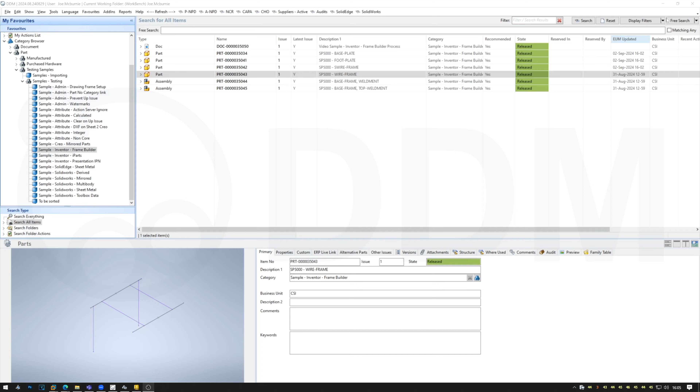Okay, I'm going to go back to Inventor and create a new assembly. So, standard assembly here, and I'm going to load into my assembly as a subpart my wireframe, like so. So here is my wireframe.

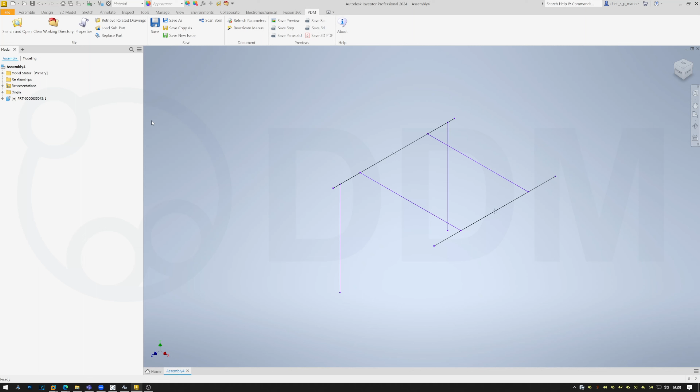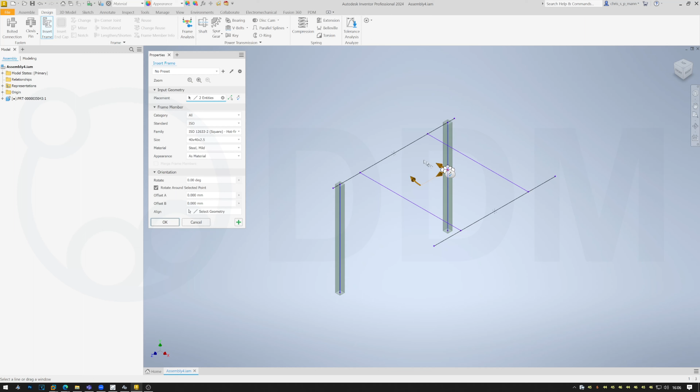What I'd like to do now is go into my design and insert a frame. I have to save it first, so I'm just going to save it locally to my working folder to pick up the assembly file. Now I'm going to choose my square hollow section 40 by 40 by 2.5, mild steel, etc, and we're just going to start by introducing these two vertical legs and this horizontal leg, and we say OK. I'm going to take the defaults. We've created 3 new parts.

Okay, if I now go to my PDM menu and I want to save this to DDM, it's going to start by saving each of the new legs. We've got this vertical leg. I'm going to drop it into a category like so and reserve it to my project.

The next vertical leg, let's copy that, paste that in, and I'm going to again put it in this category and reserve it to my project folder. We've now got the horizontal leg. Okay, copy that, paste. So saving the 3 extrusions.

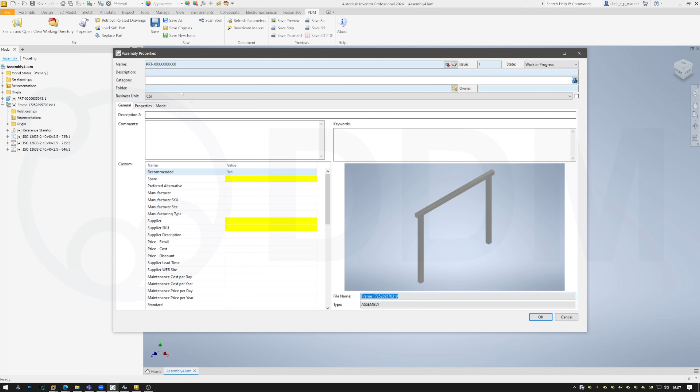And the next thing we'll be saving is the frame itself. Okay, I'm just going to call this, taking the defaults, I'm just going to call it that number, put it into this, and again store it down to my...

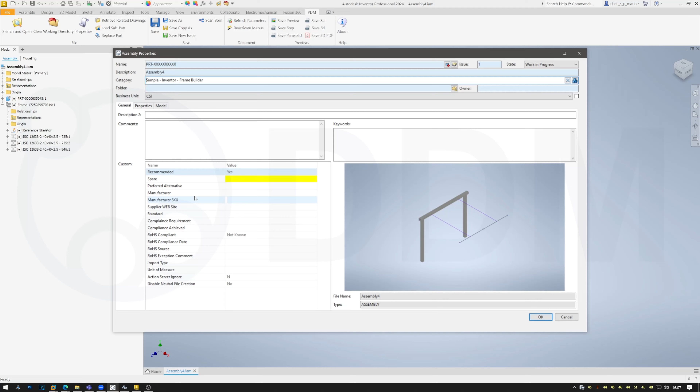...and the final thing is the complete assembly. Okay, so we're just going to again take the defaults because it's nice and quick and easy, and we're going to go frame builder, reserve it to my project.

So all the saving has been completed. It did not need to save the wireframe because that hasn't changed. So I'm going to close this out.

I'm going to clear the working folder and let's hop into DDM and refresh my screen, because what we now have inside DDM is an assembly that contains my frame assembly, made up out of these 3 legs, and we still have the wireframe within the overall assembly like this.

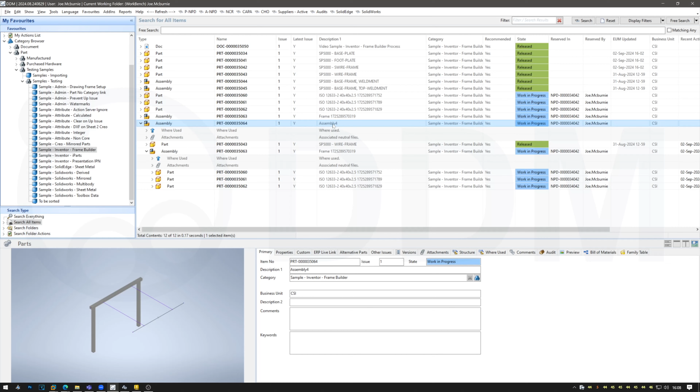Okay, if I want to, I could now reload my assembly. It understands the parts that it needs, because what I'd like to do here is continue with my design, and I'm going to now add these additional sections like so. Okay, it's going to create the new parts like so, and we're going to update DDM by saving them away.

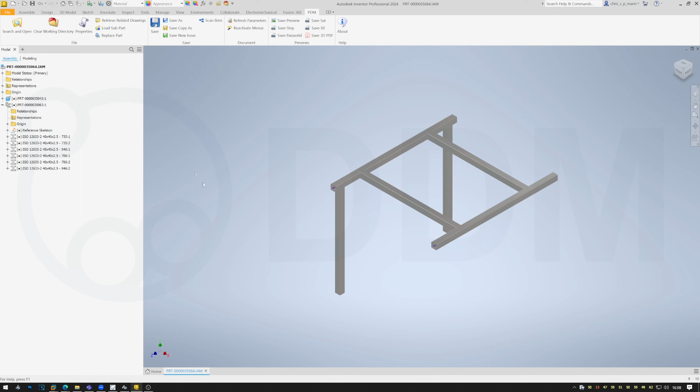Okay, and we're going to create individual parts for these. Okay, and then save it to the project. And the next one.

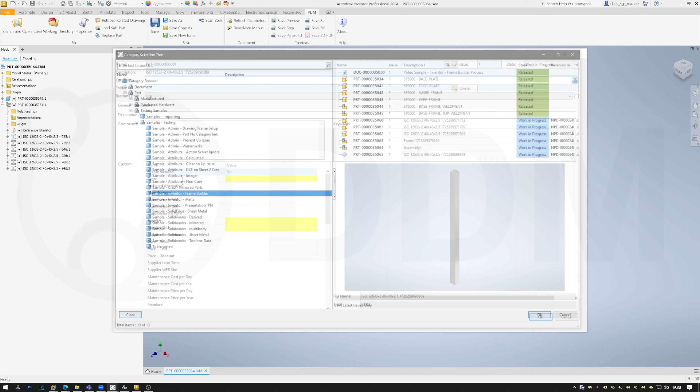Okay, and finally this new section like so. Saved away and reserved to my project. It's going to save it away. It's updating the frame and it's updating the parent assembly as well.

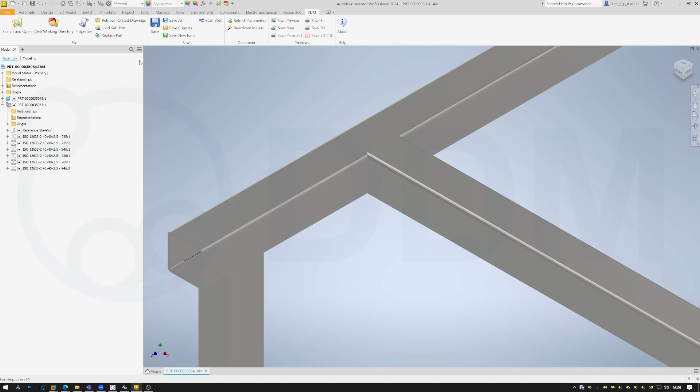Now clearly at this point, if I wanted to, I could use a lot of the other tools available to start trimming and creating the correct joints and things like that. I don't need to do that in this demonstration, because this is all about DDM handling and supporting these particular frame details within its structure.

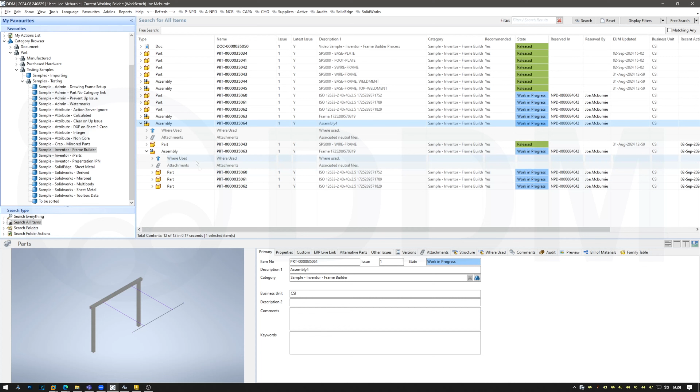I'm going to close this out. I'm going to clear my working folder, pop back into the database, refresh the screen. What I now have is my overall parent assembly that contains my frame assembly that has all 6 elements within it. Okay, and there it all is.

So a nice enhancement to DDM 2024.08 is the support of the Autodesk Inventor Frame Maker plugin.